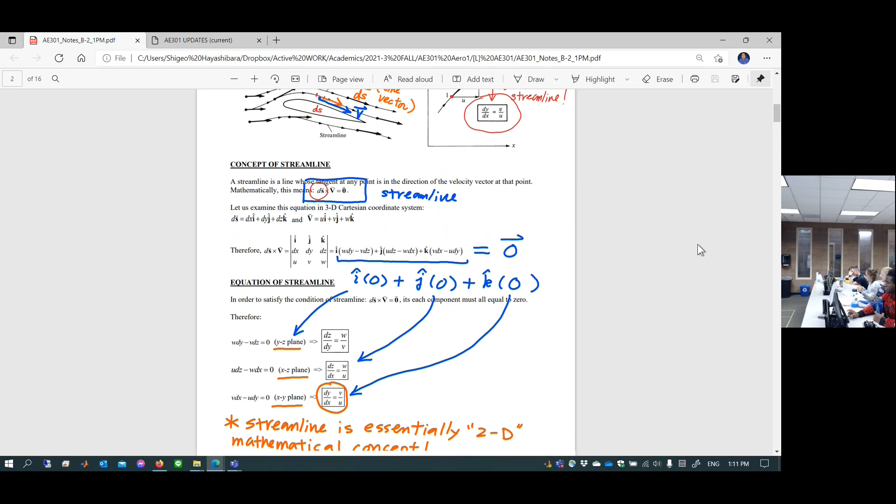Okay, so today I'm going to cover a very important subject, so stay tuned, quite important. I'm going to continue working on Unit B2. Last class we talked about streamline. Today let's take a look at strain and angular velocity. This is basically, if you include the viscosity, the mathematical model you have to handle.

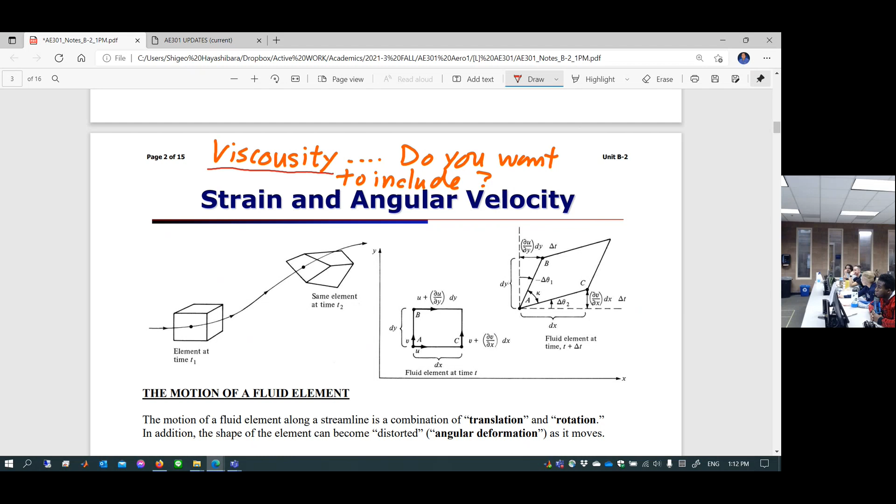Do you like it, or do you hate it to death? I don't know, viscosity included. So this is something added on. All of a sudden, your program, everything becomes an unsolvable by hand kind of problem. But the mathematical model needs to be developed to begin with. So if you include the viscosity, you can expect two things. One is this element, originally cubic shape, is going to move position.

Moving position is called translation. In other words, moving position, sliding over to another position, that's called translation. However, if you include the viscosity, this element also rotates and deforms at the same time. Rotation and deformation effects come in. This is called rotation plus angular deformation. Those two combined are coming in because of the viscosity.

If we do not include viscosity, those two can be completely ignored, and only translation is included. Mathematically speaking, this is going to massively simplify your math, so you of course desire to go with the irrotational assumption. But for a moment, today especially, we are going to include viscosity.

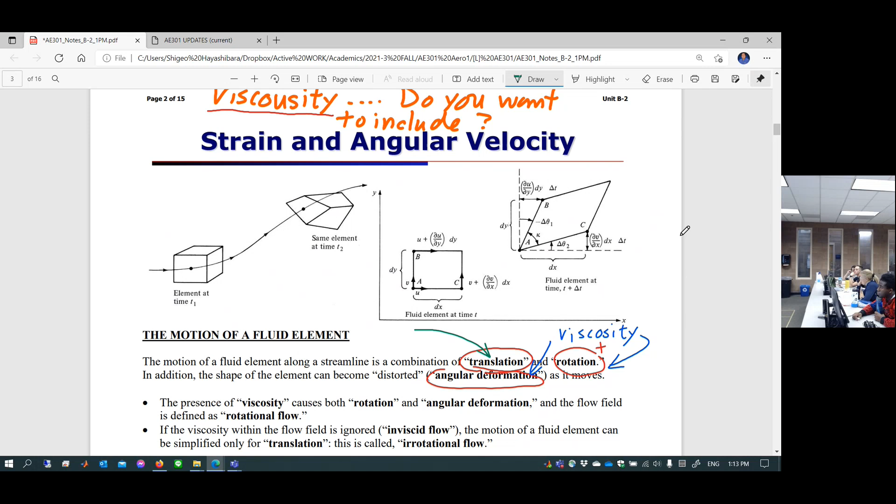So how can I express this effect of viscosity-based rotation and angular deformation? You are going to look at this figure. This is a fluid element at time t. This is the fluid element at time t plus delta t. So from t1 to t2, you have time delta t, which is equal to t2 minus t1.

Over this delta t, you're going to not only change your position, but at the same time rotate and deform your own shape. Originally cubic shape, now it's no longer cubic. This is a three-dimensional effect, as you can see, so you are going to resolve one plane at a time. We're going to take a look at the XY plane to begin with. A similar thing can be applied for the other two planes, the XZ plane and the YZ plane. Again, these are three-dimensional effects, be careful about that.

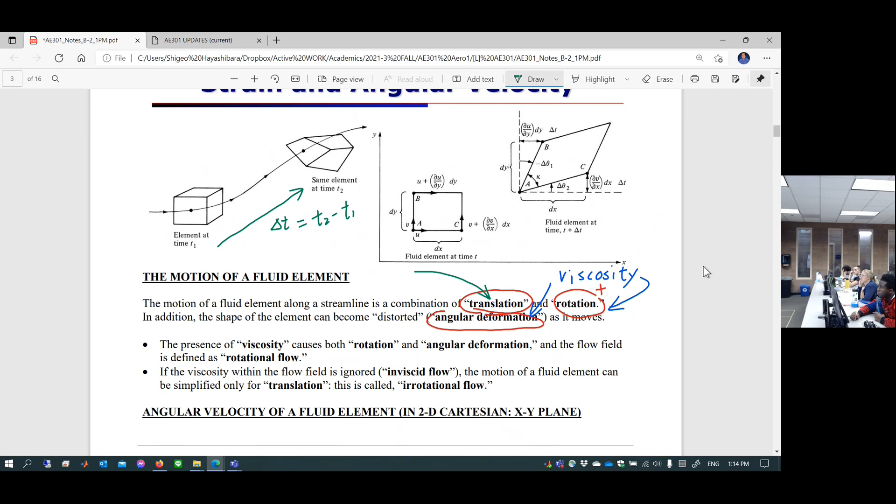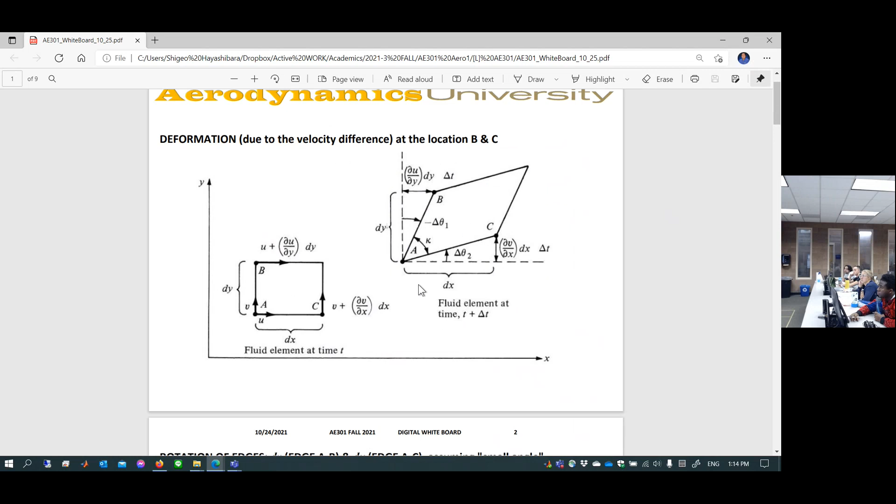Now, rather than using this space, I'm going to switch over to a different whiteboard. I have a special whiteboard for you, it's nothing, just a bigger figure. I just wanted to zoom in. You already have the figure in your notes, don't worry about it. First, let's take a look at this zoomed-in figure here. Before that, let me begin with the definition.

The motion of a fluid element along a streamline is a combination of two things: translation, and rotation plus angular deformation driven by viscosity. The presence of viscosity causes both rotation and angular deformation. The flow field with these effects is defined as rotational flow.

If the viscosity within the flow field is ignored, the motion of a fluid element can be simplified to only translation, this is called irrotational flow. So that's rotational versus irrotational flow, but let's just model today irrotational flow.

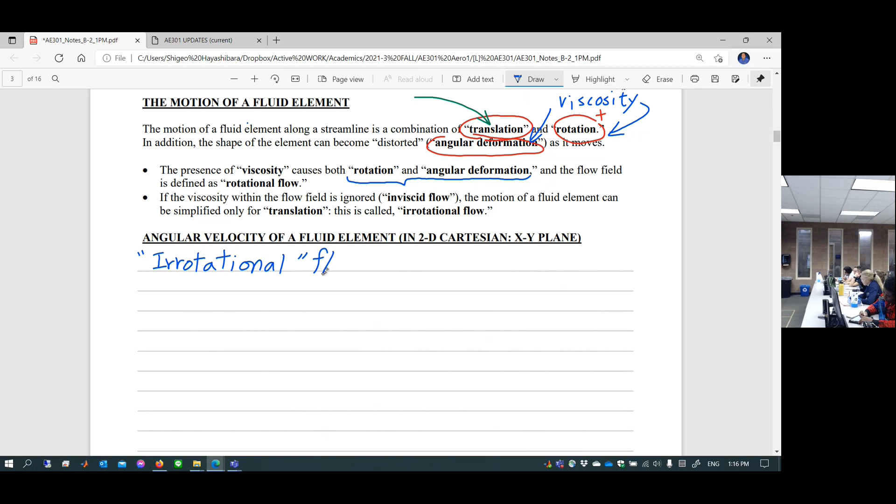Irrotational flow field. This is a mathematical model, okay? Very important.

I bet you hate this, but this is important because this is the method we choose to specify irrotational flow field. Now, irrotational flow field needs to be expressed by something called angular velocity, okay?

So let's just define angular velocity. I'm going to use lowercase Greek letter omega, with subscript omega z. In other words, angular velocity is, suppose you have an x and y plane. You have a rotation around the z-axis. That's why it's called omega z. This is xy plane angular velocity.

So we are going to take care of each plane at a time, xy plane to begin with, and you can do the similar thing for yz plane and xz plane later. So this is omega z. This is going to be defined by 1/2 of delta theta 1 over delta t plus delta theta 2 over delta t.

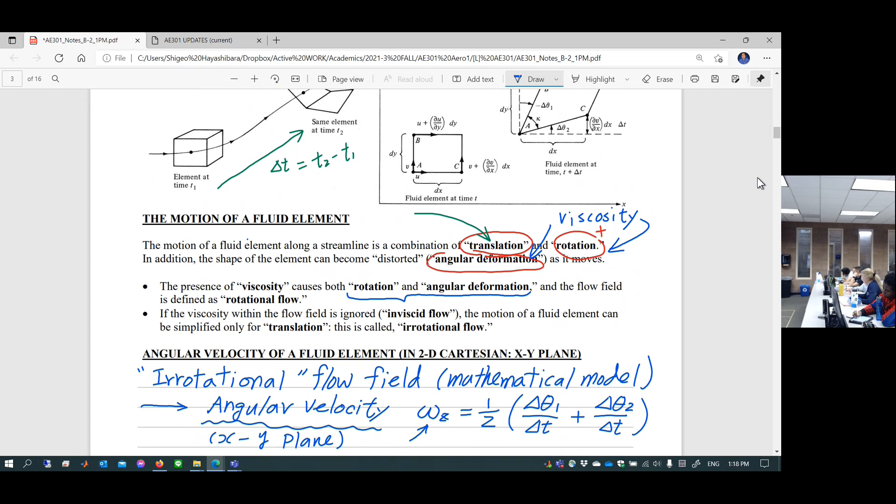This is actually a very simple concept if you stop and think about it. Angular velocity is basically the average of this angle: delta theta 1 happens over the time delta t, angular velocity; this delta theta 2 happens over the time delta t, angular velocity. So this edge and that edge rotate. Let's take an average value of angular velocity of it. So that's why this is 1/2 of delta theta 1 plus delta theta 2 divided by delta t. So this is average value of how much this edge and that edge rotates over delta t time. This is called angular velocity. Very simple concept. Okay, go ahead.

So we multiply by 1/2 as an average. That's what I said, average, yes. So this is average of each edge, how much each edge rotates over delta t. So this is angular velocity in z-axis.

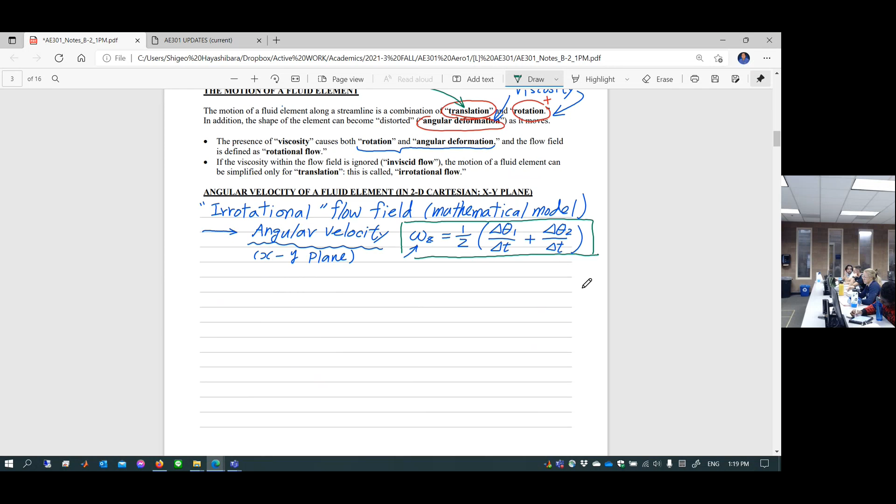In other words, x-y plane. So you are going to develop the similar angular velocity on xz plane. Xz plane is omega y, right? Xz plane is omega y, and then yz plane is omega x. So you have omega x, omega y, omega z. I'm just talking about xy plane right now.

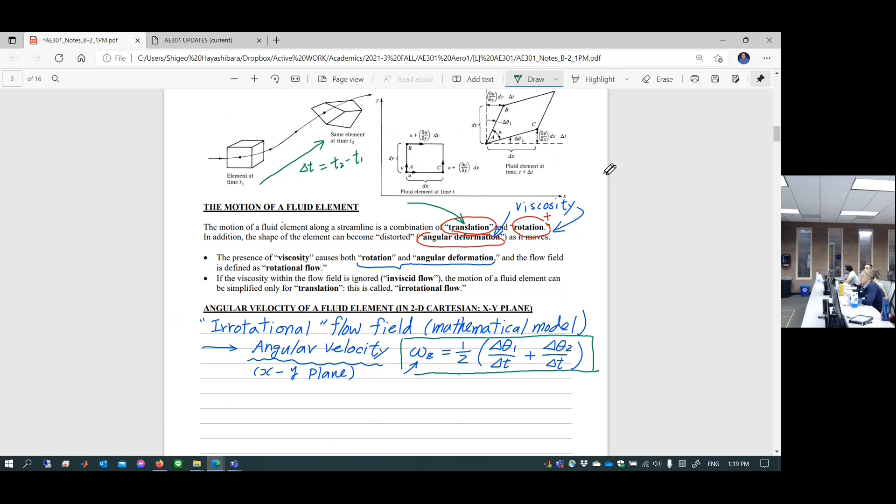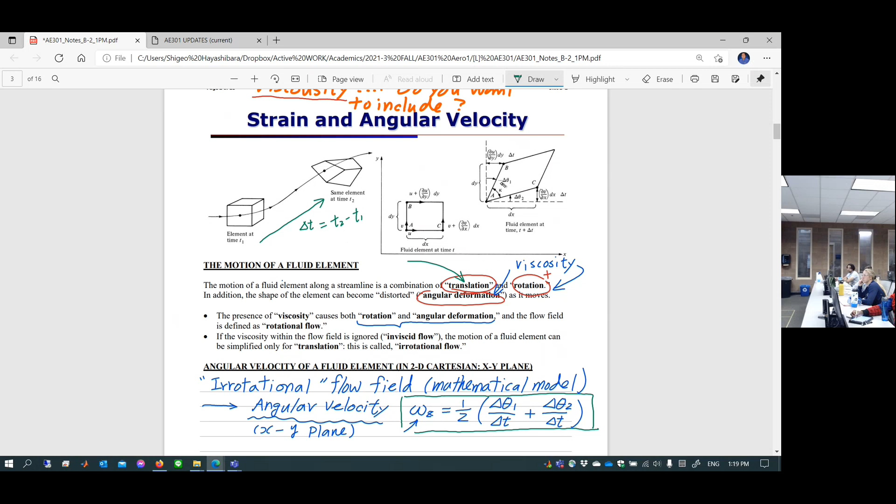So having said that, be careful about that. One of them is negative, right? Because I'm going to take the delta theta in positive and counterclockwise direction. So delta theta 2 here is positive. Delta theta 1 here happens to be negative. One is negative, one is positive. Let's be careful about that. That's the sign convention, it's just nothing, just sign convention. So this is negative direction, this is positive direction, okay?

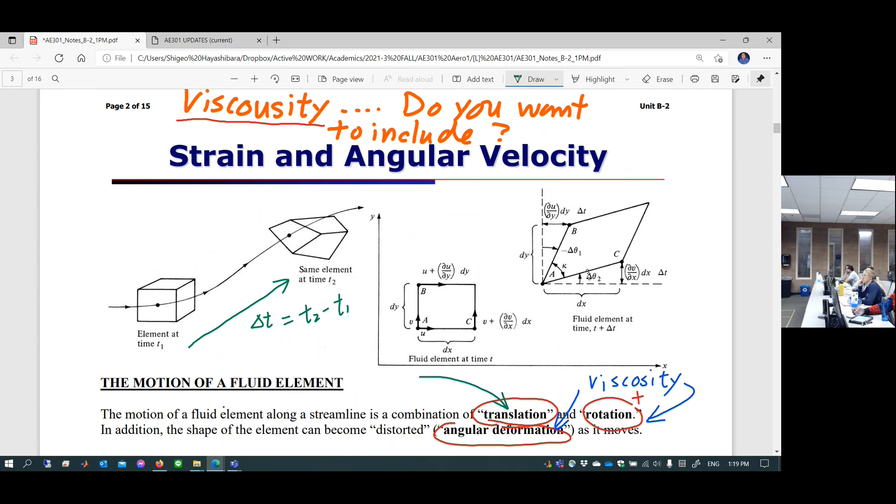So we are going to take average value for those. So now I'm going to switch it to the bigger one, I just zoom in. So I'm going to take care of two effects. In other words, viscosity is present in this flow field. If the viscosity is present, what happens here? This is the original cubic element.

However, the velocity here on this edge are different because of the viscosity. Viscosity creates the velocity variation within the flow field, right? That's what the viscosity is. So this point A is moving in x direction with velocity u, moving in y direction with velocity v. However, point B only moves in this direction with this velocity u plus du/dy, dy. What is this? This is the first order component of Taylor-series expansion, which is the general variation of velocity in x direction. So essentially, this point A, this point B are moving at different speeds.

That's why this is going to cause a rotation, right? It's because of the presence of the viscosity. You have that kind of stuff. This point also moves in y direction with different velocity from here. That's why this is going to cause rotation.

And also at the same time, you can say this point originally here, over the time delta t, moves to this point. This is the original point, moved to this point. This is the original point of point C moving to this point over the time delta t, because viscosity causes it. But this is something called deformation. In other words, this point is deformed to that point, this point is deformed to that point.

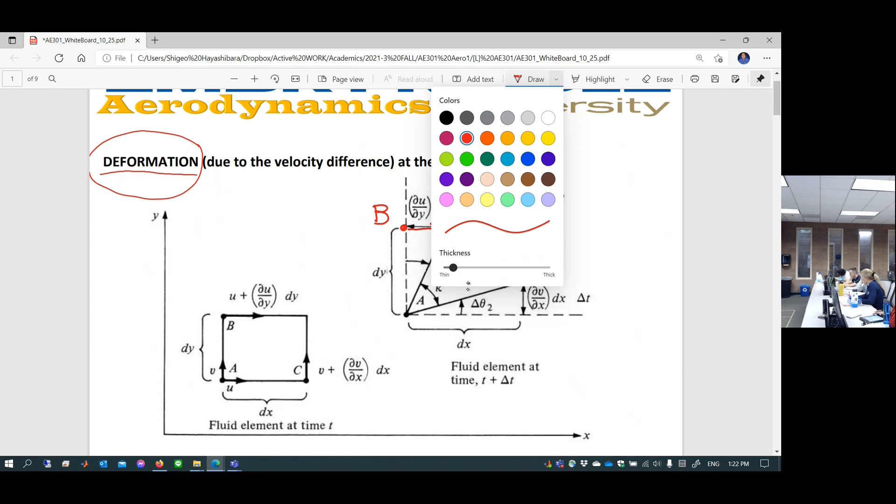So first of all, let's talk about deformation. Deformation is in red font. So deformation causes this much change of point. Original point is here. This point is moved to this point. This is a deformation. How much deformation did you have?

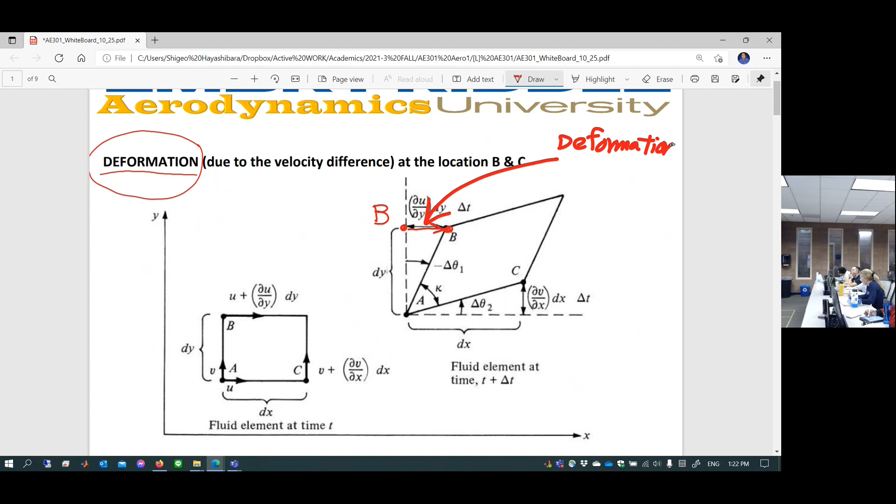Okay, so deformation, let's say this is original B, this is B prime. So deformation, original location B becomes now B prime. How much deformation do you expect over time delta t? It's basically the difference of the velocity. Velocity here in x direction is u plus du dy dy. Subtract u, velocity difference is du dy times dy. Multiply by delta t gets you the deformation distance from B to B prime. Is that correct? Yes, that's what I'm talking about.

And also, how about this point? This is the original location C, so this is C prime. Now you're looking at deformation from here to here, this much. How much deformation do you expect? Of course, it's a similar thing in y direction. Velocity difference is between point C to A. So velocity difference is dv dx multiplied by delta t. This is the deformation distance from C to C prime. Is that correct? Okay, so this is deformation.

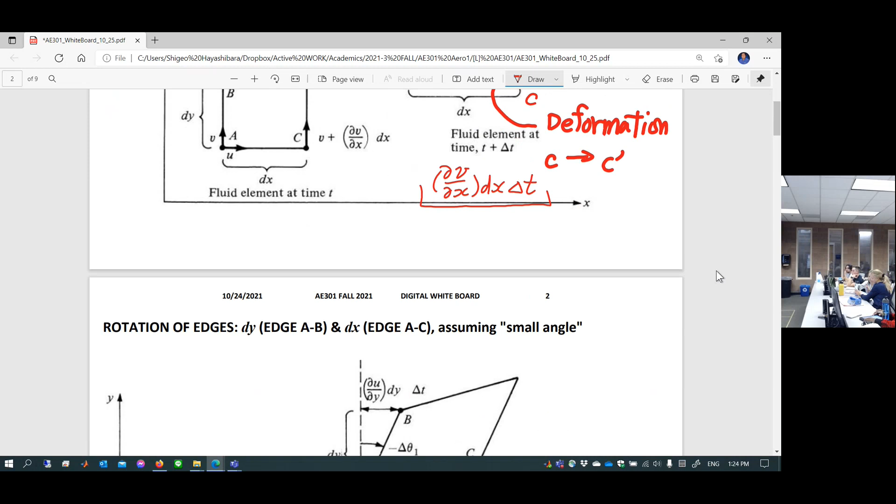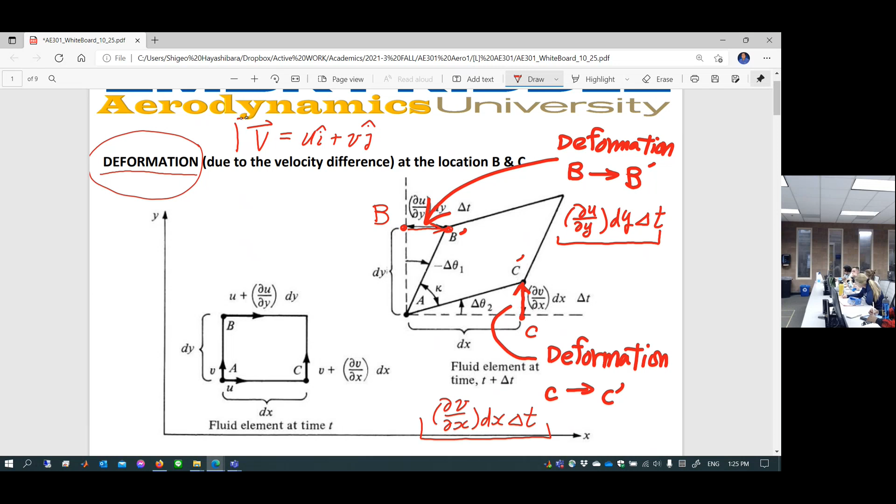So this is deformation. I'm going to go to second page. Take a look at same figure. Are U and V both velocities? Okay, just based on the basic thing. So what is velocity as a vector? Express the velocity in Cartesian x and y plane. Ui plus Vj, right? Okay, that's right. So u is the velocity's x direction component, V is the velocity's y direction component. Okay, good, very basic. This is xy plane, be careful, 2D, okay.

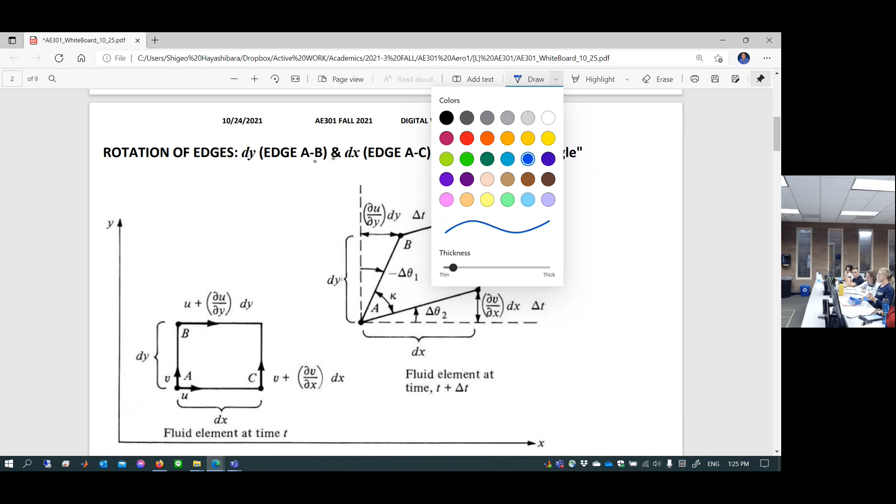So we're going to move on next page. Take a look at same figure. Now I'm going to change it to blue. Now we are going to actually take a look at rotation of edges. It's the same yet different perspective. In other words, this is rotation effect, rotation, it's not deformation, but the rotation rather. Let's assume this straight edge dy and this straight edge dx remains straight, it only rotates with this small tiny angle. One is minus delta theta 1, one is delta theta 2.

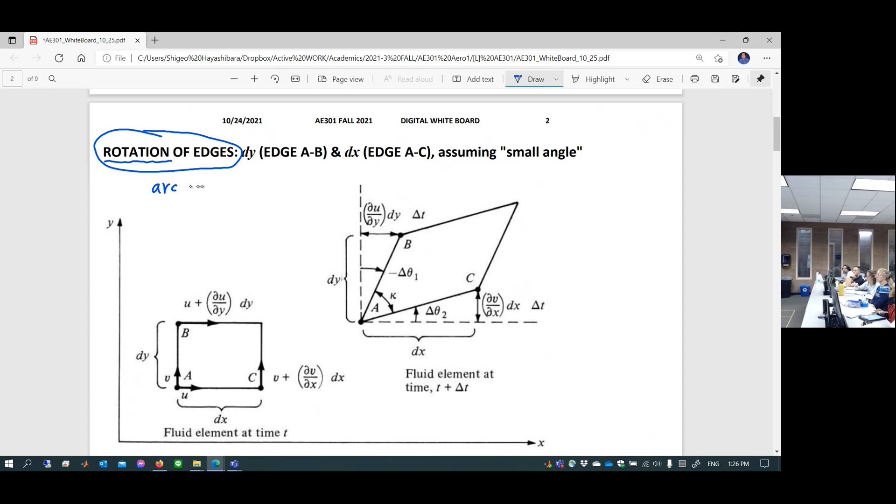So let's think about arc lengths. Do you know arc lengths? So let's assume that for a moment. So this dy doesn't change its length, it's only rotating. So this is the original location B, this is the location B prime. What is the arc length of this? Arc length is dy times delta theta 1. That's right, dy times angle, that's arc length.

Arc length is this dy times minus delta theta 1. Yeah, that's fine, 1 minus, so this is arc length, R times angle. We actually assume small angle, no? Let's be careful, it only works only for small angle. Okay, so this is also same thing. This is original location C, so this is C prime. Let's find out this arc length. What is this arc length? dx delta theta 2, dx times delta theta 2. That's right, so those are arc lengths.

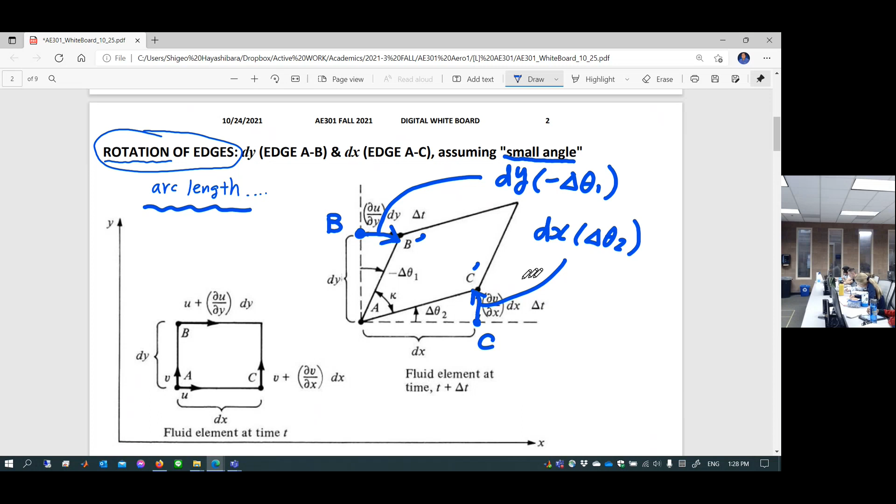So we are looking at kind of same thing with two different perspectives. One is a deformation effect, the other one is a rotation effect. Are those equal to each other? So these are the arc lengths B to B prime, C to C prime. So this is deformation from B to B prime, C to C prime, and those equal to each other. Let's just set equal to each other.

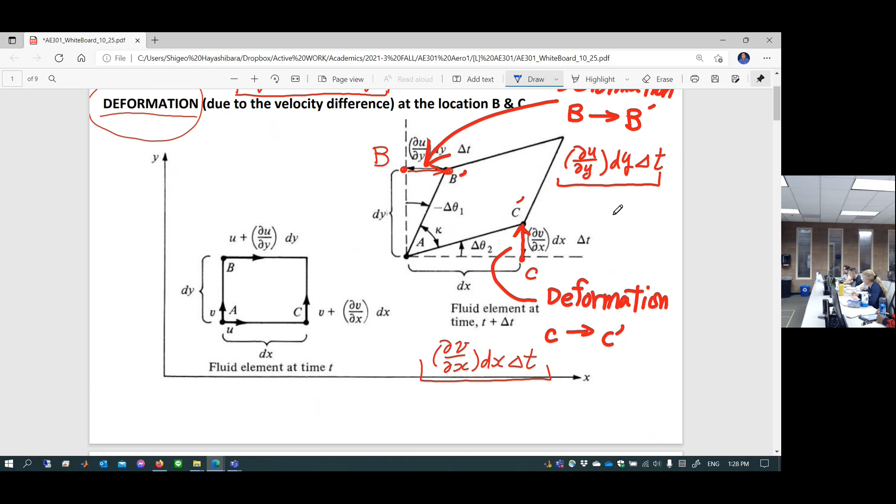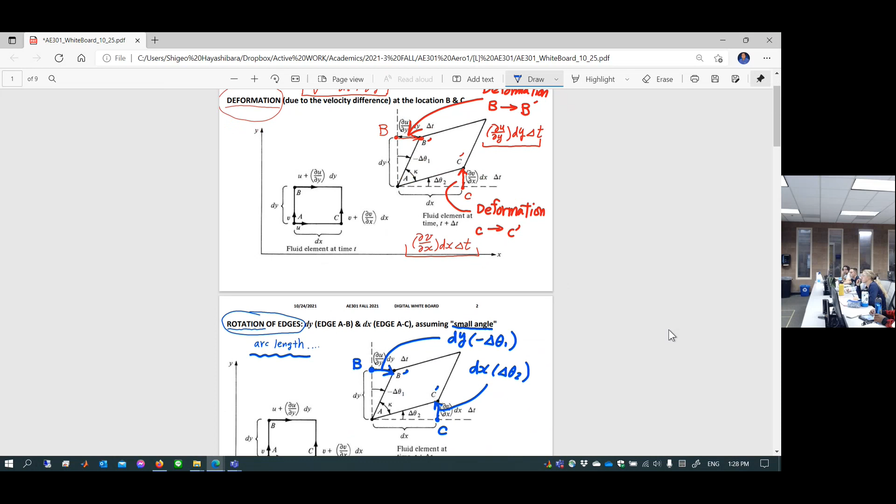Okay, so next page, actually not the next page, we're going to go back to the original note. Let me just zoom out a little bit, take a look at the entire picture here. So if you zoom out, interestingly, those two looks exactly the same, especially if it's a small angle. So this distance, B to B prime, same thing, one is deformation, one is rotation. Question: is that a proper assumption that the deformation and the rotation are equal to each other? In this case, yes, because it's angular velocity. That's fine. Would you get a different equation if you were to say we're not going to assume that they're equal to each other?

In an exact sense, for a large angle, one is probably the inverse tangent of something, the other is tan of something.

But let's assume a small angle, so this thing and that thing are equal to each other, and that's the bottom line assumption here, because we want to simplify. It's easier to go for a more complicated equation that people hate to use. If that's what you want, I can do that in this class, but I know you don't want to, especially for exam 2.

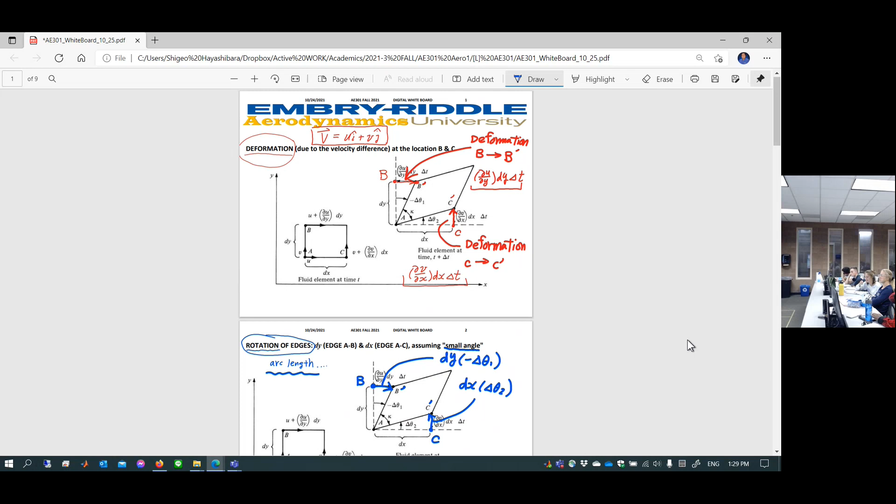I want to make everything simple. So this is my attempt to derive a simple equation. This is equal to that, so that means this is equal to that, and this equal to that. Let's do that. I'm going to go back to my original note.

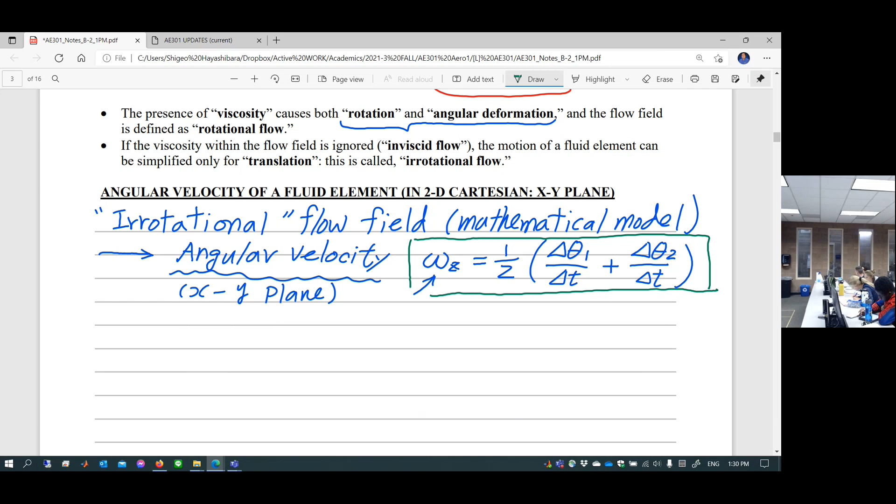What? Are you okay? Oh my goodness, this is math class, okay? I told you. Am I in aero class? No, this is math class, as long as unit 3 is concerned. Go ahead, question.

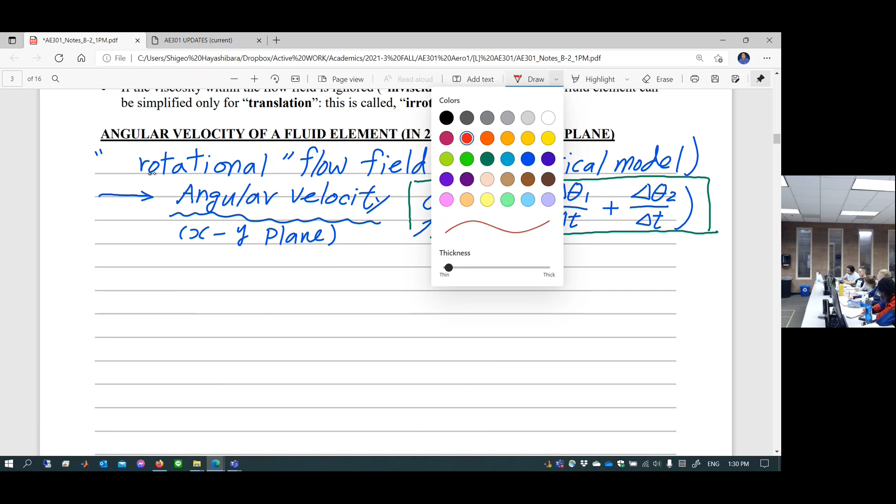Aren't we looking at a rotational flow field and not irrotational? That's a good point. This is rotational, big time. Irrotational means if you ignore all of those things. This is rotational flow field, big time. Yes, rotational flow. If we ignore all of those in today's class, it's called irrotational.

So therefore we are going to do this. Let's equate rotation and deformation. Sorry, that's opposite, translational, deformation and rotation. Let's equate deformation and rotation, effects due to viscosity, both coming from viscosity.

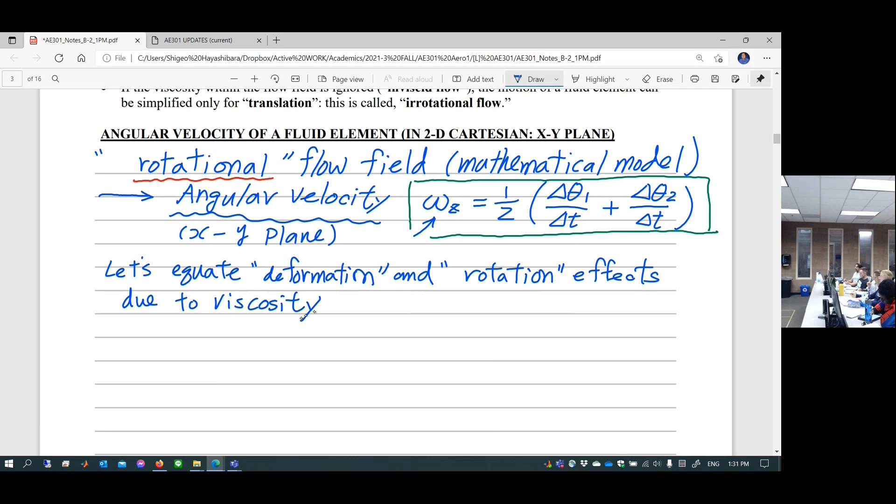Coming from the other whiteboard, let's basically say, first of all, the edge dy. Edge dy basically says you have a deformation effect, du/dy times dy delta t. This is deformation. This is equal to dy times minus delta theta 1. This is going to simplify. Delta theta 1 delta t is equal to, well, of course you can cancel out this dy and dy. So this gives you delta theta 1 delta t is equal to negative du/dy. Oh, okay, this is interesting.

And then how about the other edge, the edge dx. Similarly, this is going to be dv/dx, dx delta t is equal to dx times delta theta 2. Now obviously dx cancels out, then you are going to have an equation like this: delta theta 2 delta t is equal to dv/dx.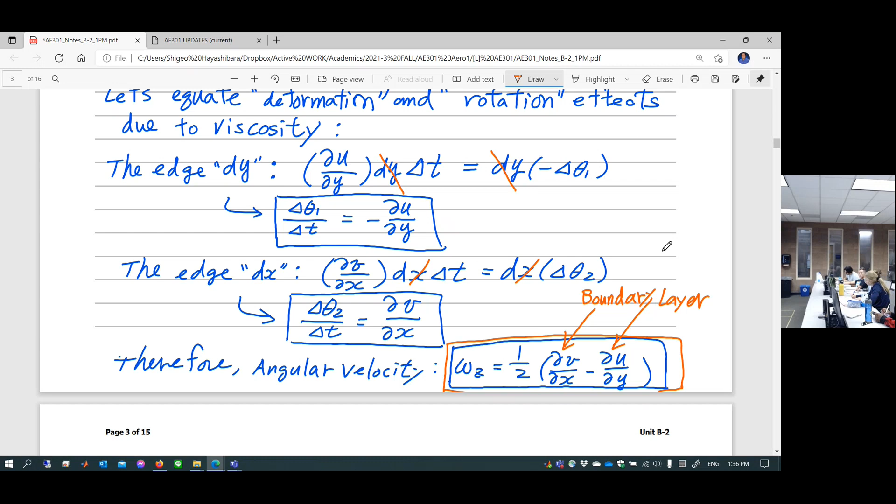And of course, within the boundary layer, shear stress is developed, right? Shear stress developed on the surface, the skin of the airplane, is something called skin friction drag. You have to deal with it.

So this is angular velocity. Angular velocity is, by the way, three-dimensional. We just derived this thing. This is omega z, for the x-y plane. You can do the same thing for omega y, this is the xz plane. This is omega x, the yz plane.

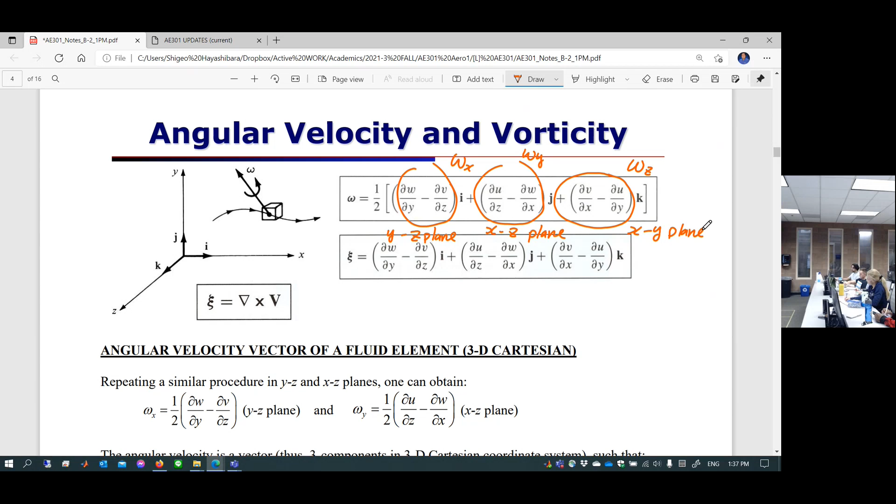So this is three-dimensional. A three-dimensional flow field with viscosity involved requires fully mathematical analysis of first-order partial differential equations everywhere. How can you do it by hand? It's impossible. You have to have some model. That's called the turbulence model. Here we go. Welcome to the introduction to turbulence model discussions.

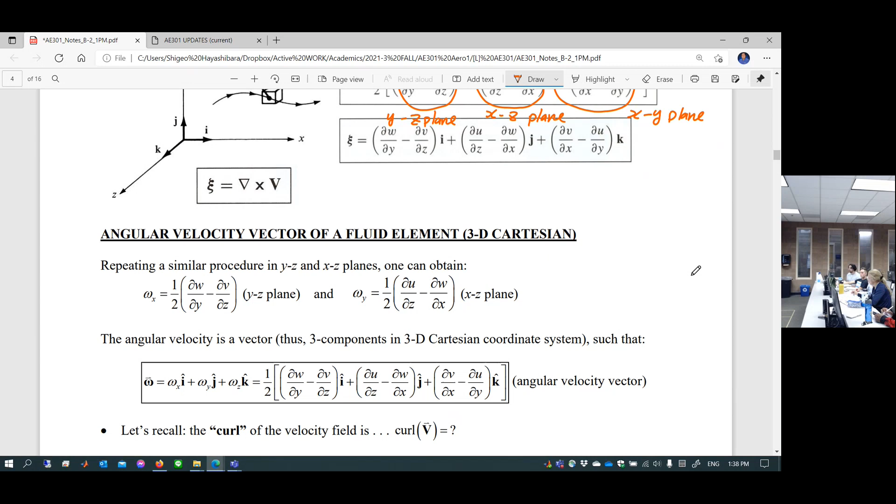AE999, Advanced Turbulence Modeling - I took it when I was a PhD student. This is the introduction to it, if you want to step into that kind of phase. I have no clue what was taught in that class, honestly. It was almost like a philosophy talk - somebody came up with this model, this model works very well for this application but doesn't work at all for the other, and I don't know why. Let's discuss about it. Even the professor doesn't know. That's turbulence modeling.

You're not going to do it in AE301, of course, but let's simplify it. Have you done unit B1? Have you seen this expression, vorticity? What's this? Del cross V. What's del cross V? Vorticity, or curl V. This is called curl.

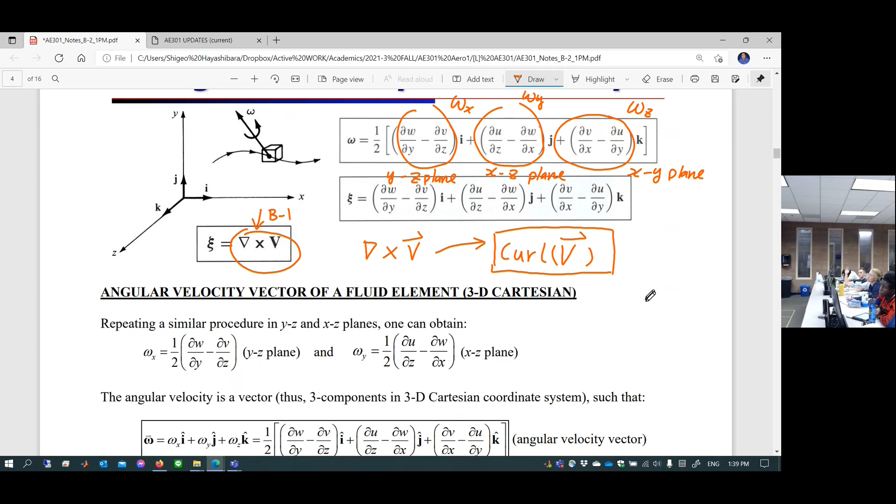So a mathematician came up with the expression of curl V. What is curl V? Twice of angular velocity in a viscous flow field is expressed by curl V. That's the mathematical expression invented for theory of aerodynamics. So go back in unit B1 and take a look at what curl V is. Curl V is twice of omega. This is called vorticity of the flow field, two times omega.

So obviously, if you take a look once again at the unit B1 material, there's a definition of del cross V, right? Somewhere. Please go take a look. This is like the Cartesian and cylindrical curl of a velocity field - this is the mathematical expression, curl V, which actually represents twice of angular velocity, called vorticity. So now every single mathematical expression introduced in unit B1 is associated with something physical in the flow field. It's your job to associate with it - those are no longer just mathematics you have to memorize, they actually come with physical meaning.

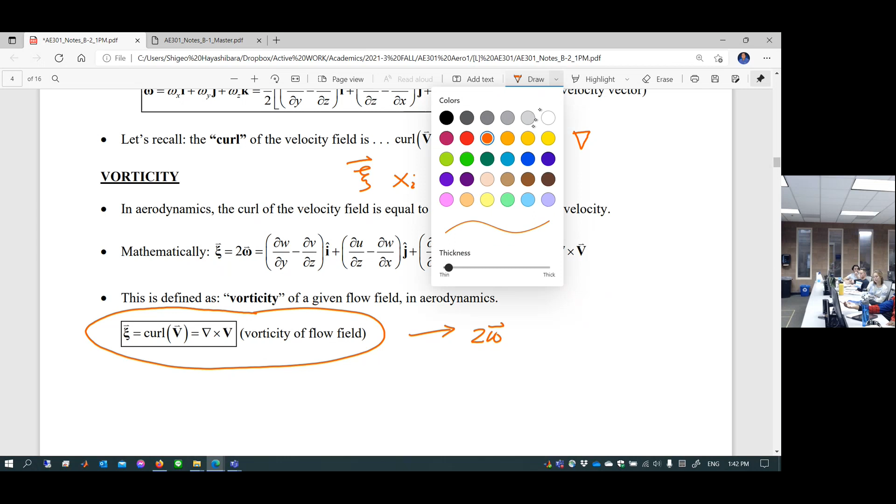So you have components of U, V, and W in the vorticity equation. Does that mean the viscosity is dependent on the velocity of the flow field? Viscosity is a property which usually depends only on the material. So viscosity of air is viscosity of air.

Now velocity is a three-dimensional vector. In 3D Cartesian, velocity has components in x, y, z direction: u, v, w. Each one is affected by viscosity, meaning each will have a different value at each location. So u is a function of x, y, z; v is a function of x, y, z; w is also a function of x, y, z. If you look at different locations, you have all three different components of velocity at different locations if you include viscosity in the flow field. That's how much confusion and complication you introduce by including viscosity.

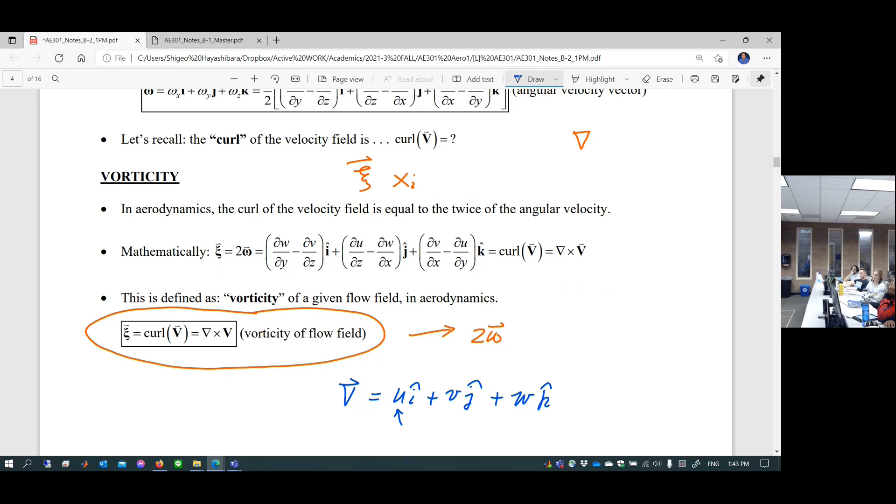Irrotational flow - this is the definition of irrotational flow. Vorticity set equal to 0. This is going to simplify your equation big time.

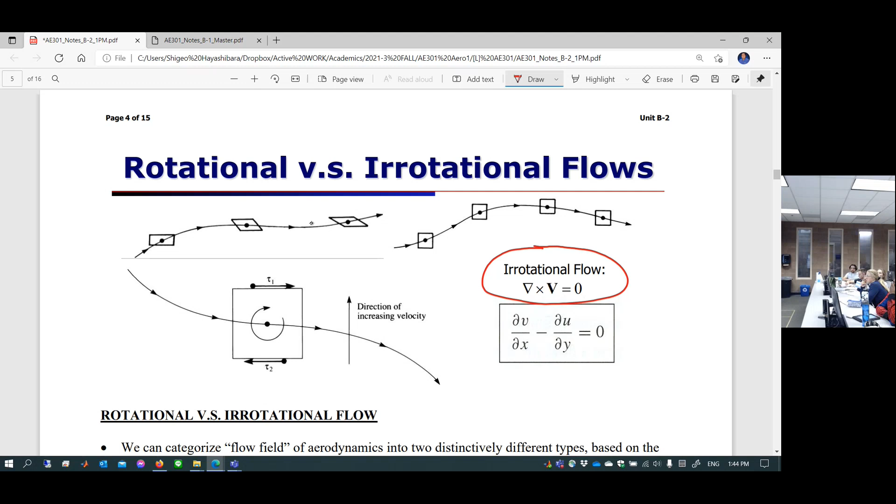So this is a rotational flow field. As you move along the streamline, the original shape of a rectangular element keeps rotating and deforming all the time. You have to keep track of that shape constantly. Mathematically, at every location you have to track all those first order partial differential equations all the time. Quite frankly, by hand it's impossible. You have to have computational fluid dynamics - even simple CFD including viscosity laminar flow simulation is this kind of flow field. You can never do it by hand, obviously.

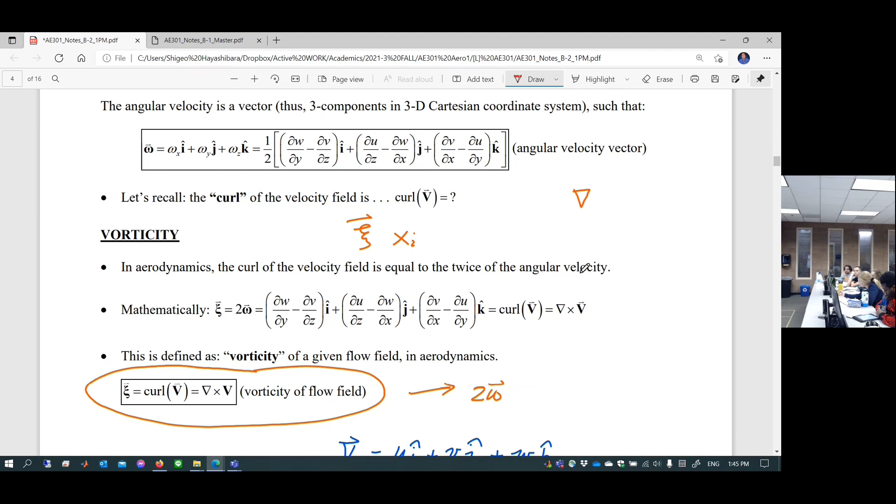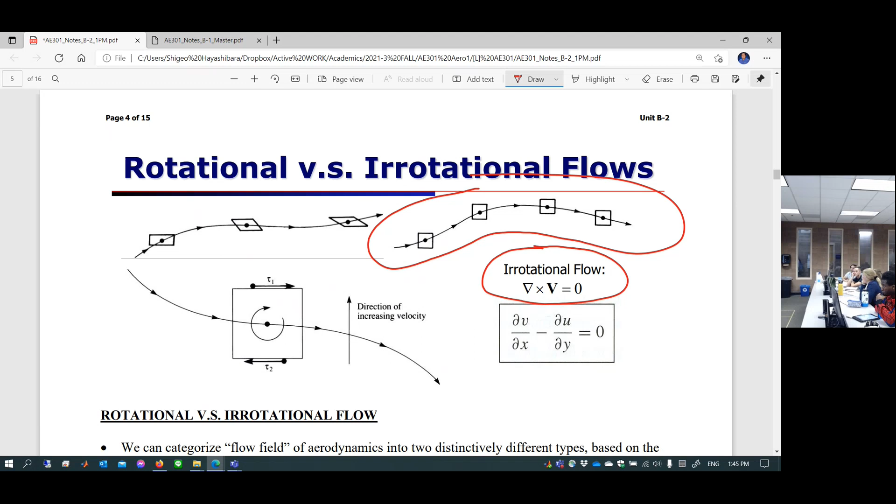Now somehow you want to bring it down to a more simplified model, so let's just for a moment ignore that effect. In other words, the flow field is irrotational, meaning vorticity is 0. Take the curl of a velocity field at any location and it is going to be 0. That means the flow field is, quite frankly, this kind of flow - it doesn't rotate or deform, it just slides over. Okay so far? Do you want to go with it? Sounds great.

Okay, so this is the rotational flow field, and now this is the introduction to ideal or potential flow field. Why do we call this potential flow field? Ideal flow - first you have to assume something. The big assumption is the mathematical assumption called irrotational flow field assumption. Once you assume irrotational, that means irrotational. This is important - it's a mathematical simplification, big time math.

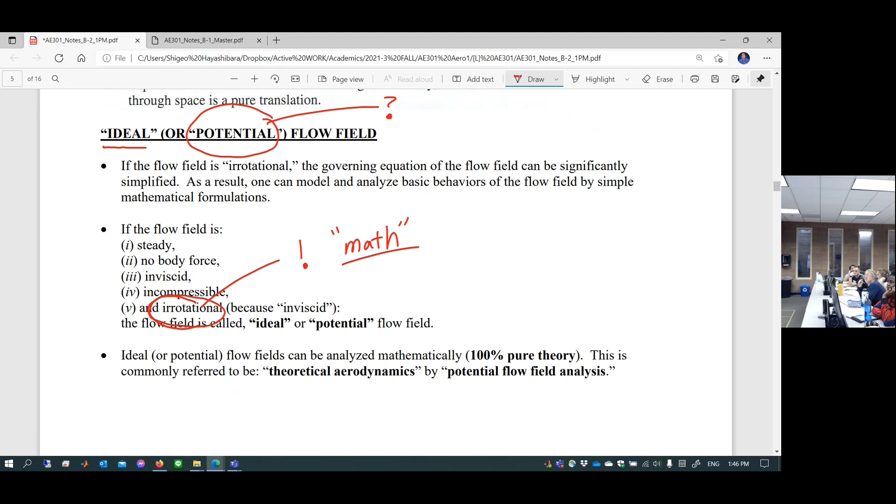You're going to simplify your math. Of course it's coming from inviscid, but inviscid alone is not going to simplify your mathematics. You have to apply this mathematical expression to assume this is irrotational flow. That opens the door for mathematical analysis of flow field, something called ideal or potential flow field analysis. That's the big subject of Unit B3, B4, and then you go through 2 projects - Project 2A and B is all about ideal flow field analysis. This is 100% pure theory.

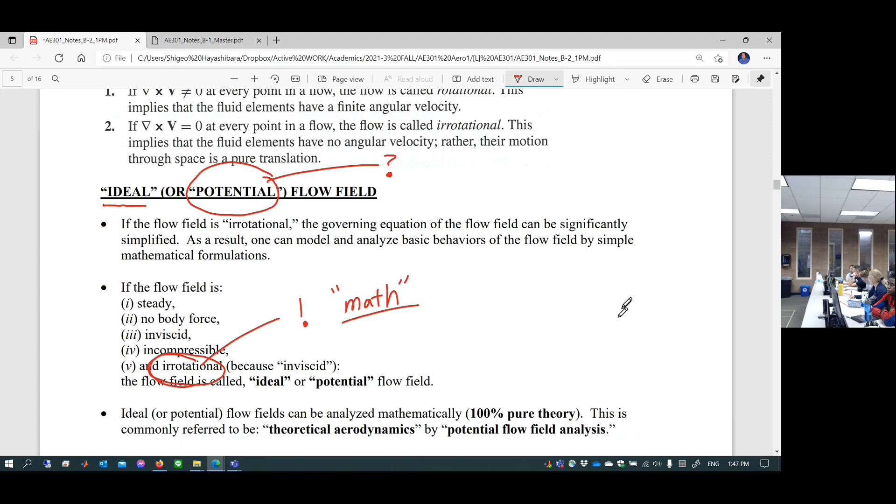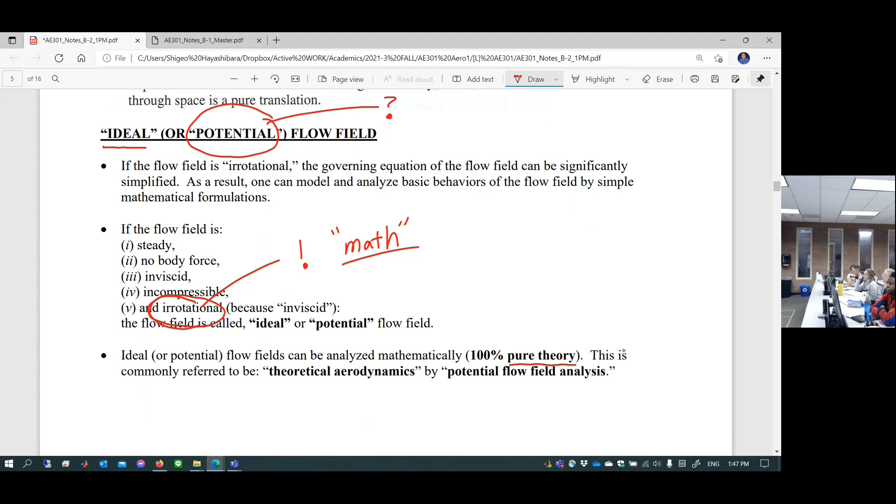What do you mean, it's hand math? Hand math is kind of interesting - unless the math is algebraic, I don't think you can handle it by hand. You don't want to deal with nonlinear partial differential equations, so we want to avoid it. That's what it is. So next class - go ahead, if you scroll up...

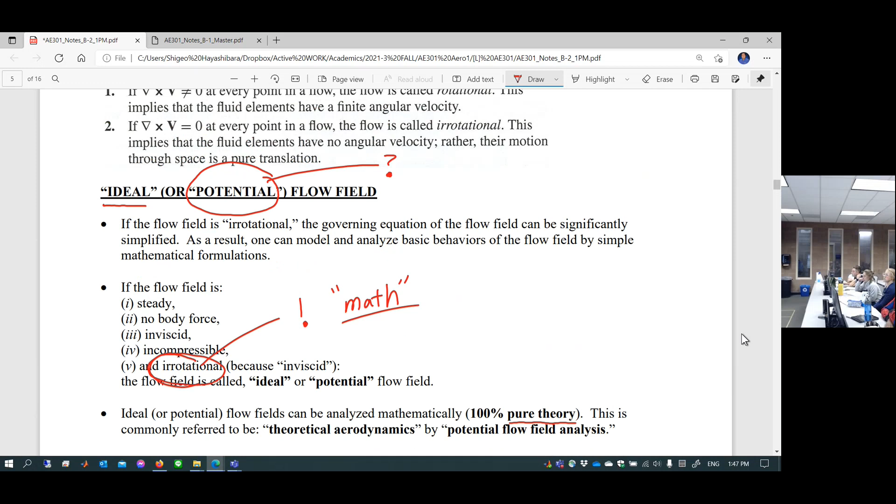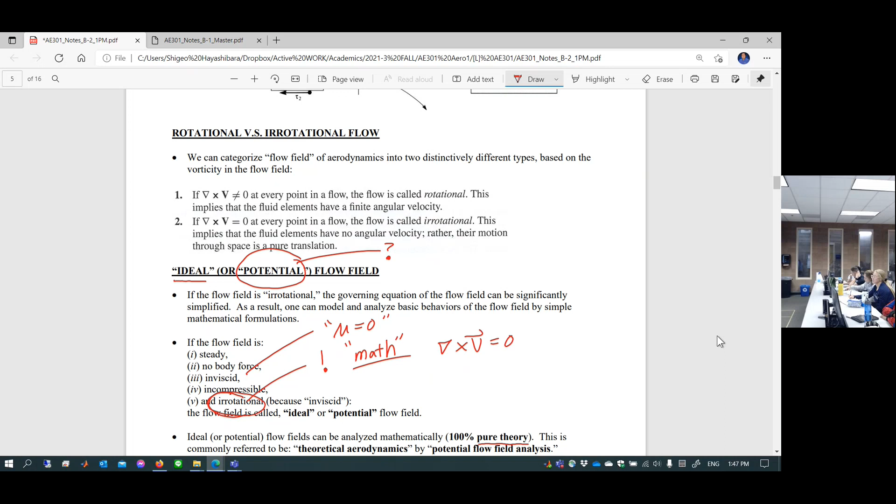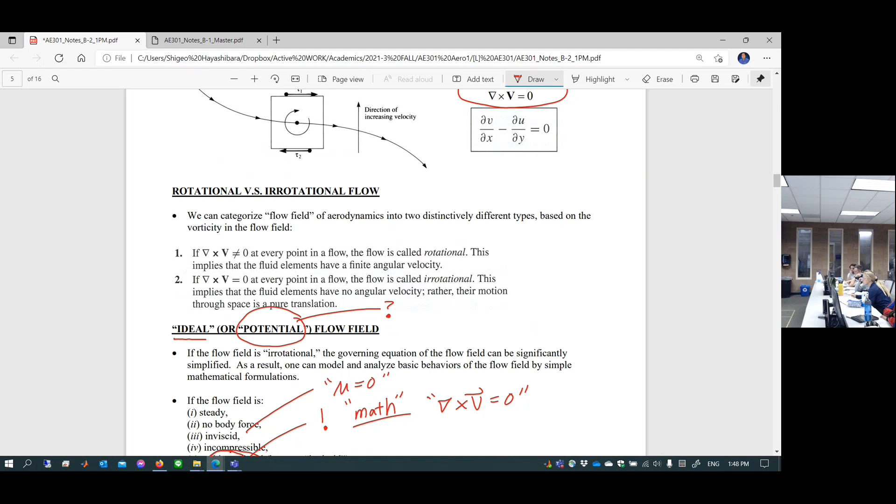Wouldn't it be redundant because irrotational means it has to be inviscid? Yeah, that's right. Inviscid means you're going to assume viscosity is 0, mu equal to 0 - this is inviscid. Now irrotational is mathematically assuming this is correct. So it's physically the same thing, but two different assumptions. It sounds redundant, but we have to list it separately because one comes from assuming viscosity zero, and the other is mathematically, if you take the vorticity of a flow field, it's going to be zero. So we're listing those two separately.

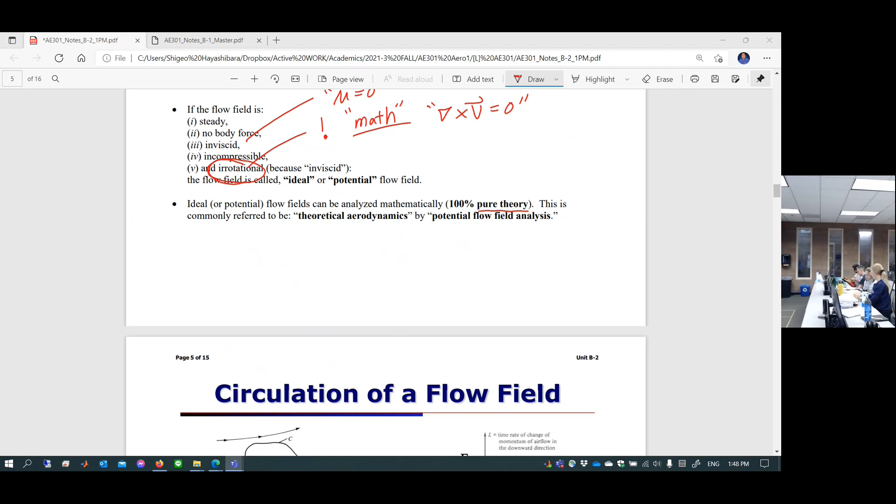What? You just look like you're staring at it. I'm staring intently. Oh yeah, the lab report? Yeah.